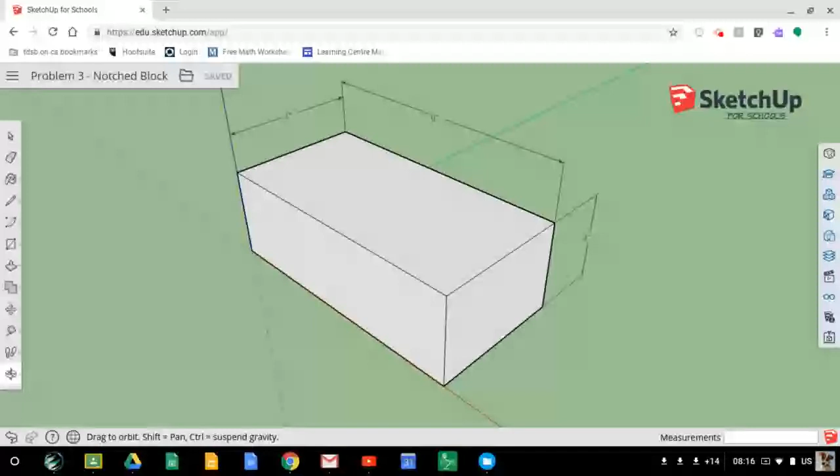So what we need to do is start with the tape measure tool. Tape measure starts with T, so we hit T. There's our tape measure tool. What we're going to do is look to see how far it is from this edge to the right side of our notch, and then how far it is from this side to the left side of our notch. So let's take a look here.

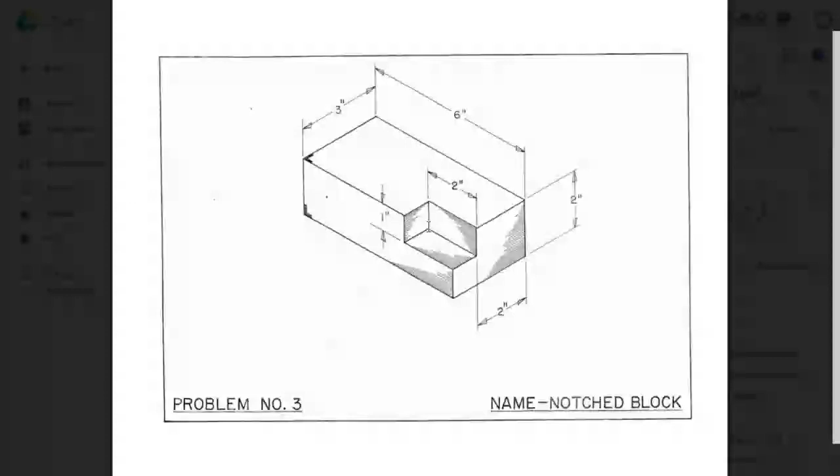So the left side is 2, but we don't know how deep this notch is here because it only says how far it is from the existing edge, 2 inches. So we have to take the overall distance, which is 3 inches wide, and subtract 2 inches. So 3 minus 2 is 1. So I know that this notch here is 1 inch in by 2 inches long.

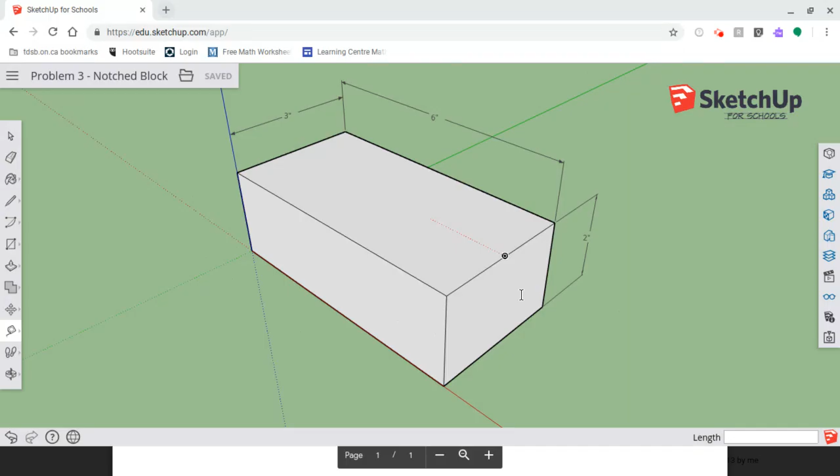So I'm going to click somewhere on the edge with my tape measure, and I'm going to move over, and then I'm going to hit 1 and enter. And you see it shows up in the bottom right here.

And this time we go from this edge, and I click. Don't hold your mouse down. Click, and then move your mouse. And if you remember, it was 2 inches. So watch the bottom right corner. I hit 2, and then I hit enter.

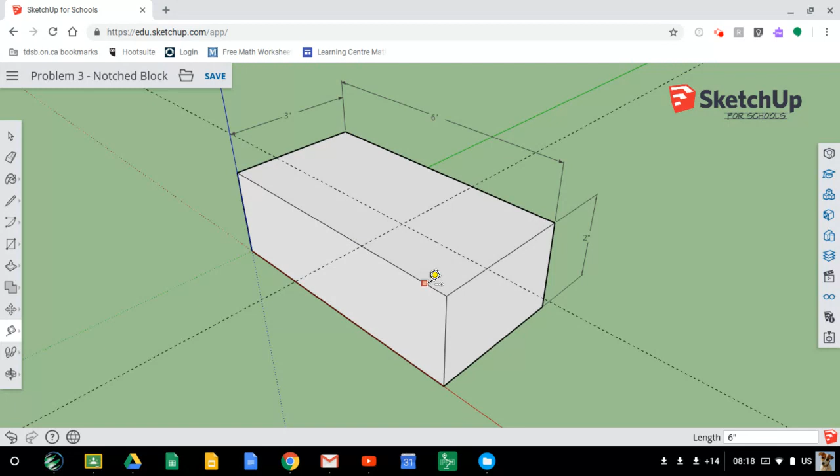So now I have my guidelines, and that looks kind of something like this. Now, I can't push this down. If you try pushing this, it pushes the whole shape. So we aren't ready yet. So I'm going to hit escape in the top left corner of my keyboard.

I need to draw a rectangle here. So I'm going to use R for rectangle. I'm going to click on one of the intersections. I'm going to move my mouse, and I'm going to click again. And now this time I can push pull.

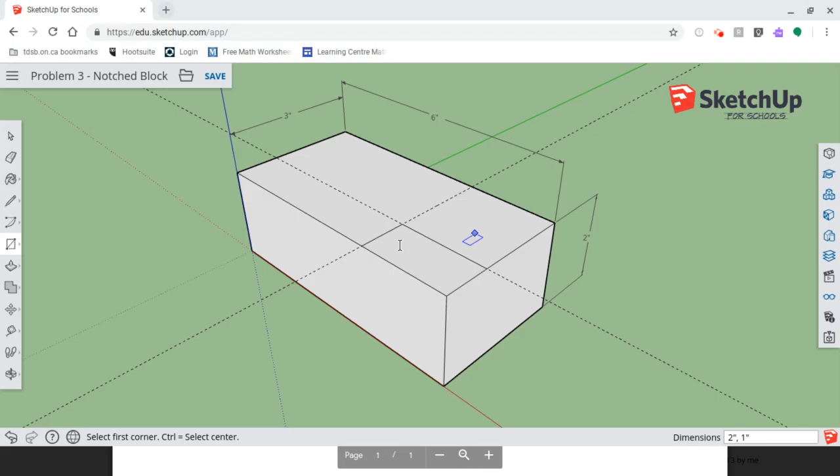And if you recall, the height is down 1 inch. So I'm going to say P for push pull, which we already know. Click and move down. And then I'm going to hit 1, and I'm going to hit enter. And that's it. Oh, I forgot one thing. Two things, actually. Forgot to erase my guidelines.

So if you're predicting along with me, you've seen we've done T for tape measure and R for rectangle. You guessed it, E is for eraser. So I'm going to erase that guideline and this one. I'm going to put my dimensions on, and then I am done.

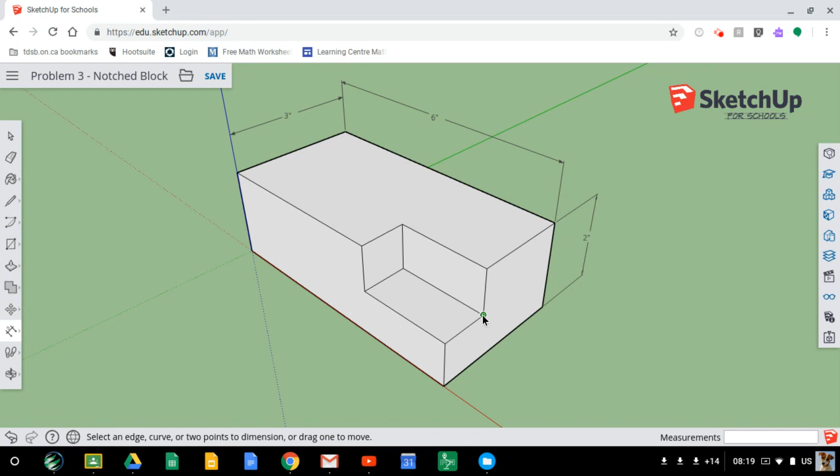Sometimes you might get a bit tricky trying to get this one here. So I'm going to go like this, go down, and that, let's see, yeah, that's how we do that one. I've got this line here, dimension, and this line here, dimension.

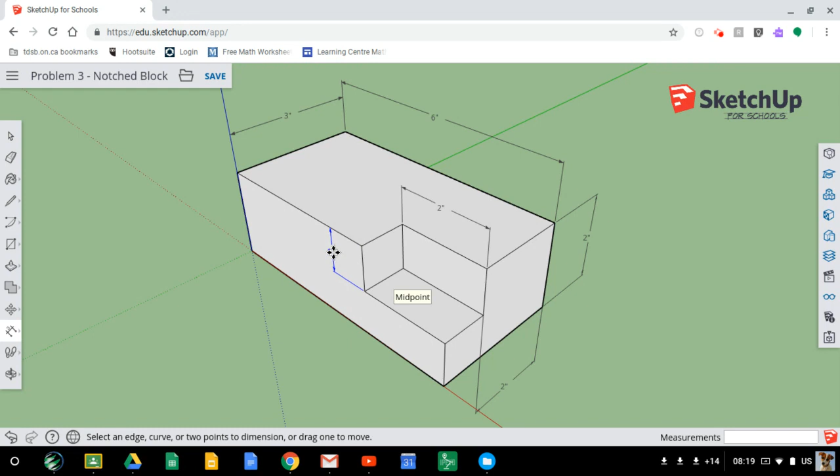Which way did it come? It came sideways. Now notice it doesn't exactly look the same as a drawing. The one is on the outside with the arrows. This is the way you would do it drawing by hand, so that's why it's got the arrows on the outside. But the computer can scale these things very easily, so it always does the arrows on the inside.